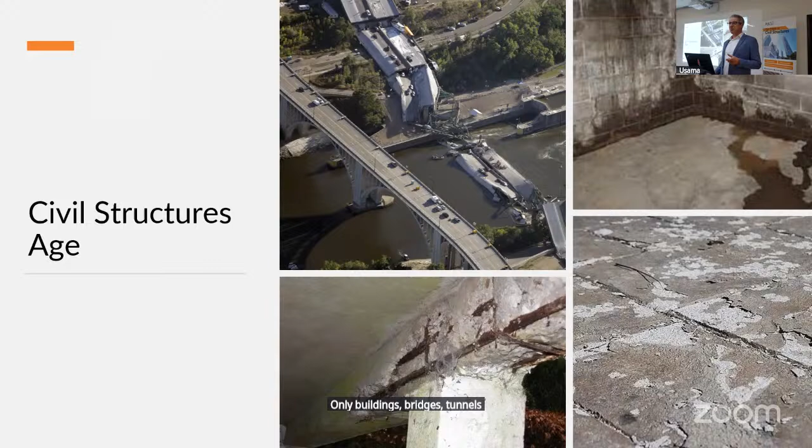We find out about those currently through periodic inspection. Periodic inspection happens every 2 to 5 years, depending on the client, depending on the regulations. To share with you the output of what RTA looks at, for instance, here locally, they do regular inspection of their assets, and then they categorize those assets from 1 to 4, 1 being good, 4 being critical.

Good is described as the element shows no deterioration. It implies it's visual - a visual inspection. Visual inspection tells us what's happening on the surface; they don't go beyond that. Go a step further to fair: minor cracks and spalls are appearing. So already we have cracks and spalls that require repair. That's the extent of what visual inspection can inform us.

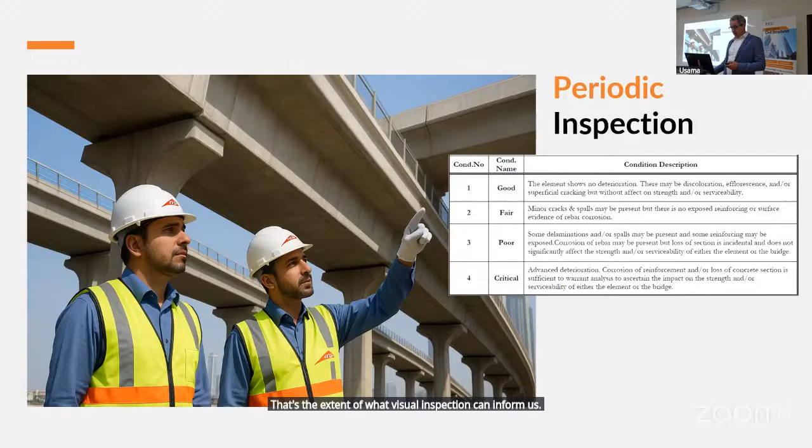One of the other challenges of periodic inspection is access limitation. Sometimes you require special access equipment to be able to reach the areas requiring inspection. And there are underwater structures that may require specialized divers to inspect and inform us about what's happening visually.

We can go beyond the visual using non-destructive techniques, non-destructive inspection. That is usually called upon when visual inspection already tells us there's an issue. Visual inspection uncovers an issue, and we go a step further using NDT to find out how widespread the issue is. That's when we'll start looking a little bit beneath. But NDT also has limitations in terms of how inaccessible areas can be reached.

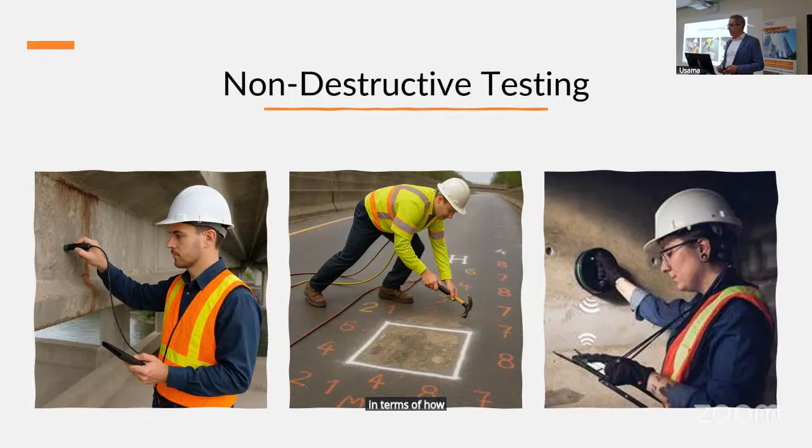In 85% of cases, we find out about problems when they're quite advanced, when they require major repairs. And just like with human health, if you catch something late, the intervention is more complicated, may not be as effective, and is more costly. That's what happens with major repairs.

We're involved in a project in Business Bay where the parking has been shut down for repairs. You've been through traffic, you know the parking situation in the city. When the parking is shut down for repair, that's a major disruption for the tenants of that building, and a major reputational disruption for the landlord. So repairs, when they're major, are quite disruptive and costly.

Sometimes we uncover things a bit too late. These are actual cases in Dubai. This is a headline from a local newspaper: '10-year-old buildings face demolition. Over 400 homeowners uncertain about future.' Expert committee finds structural defects, severe corrosion, which requires direct and rapid intervention. These things are real. It does get to that extent.

This is a collapse that happened in Dubai Marina. Corrosion was one of the causes of this collapse. So it gets this bad.

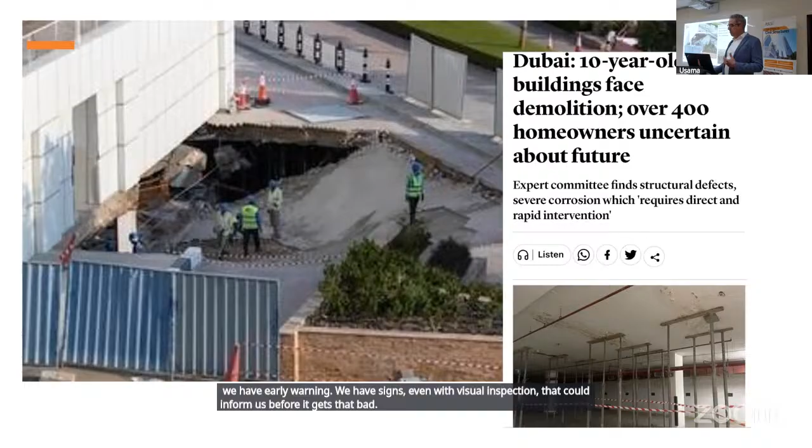Usually we have early warning. We have signs, even with visual inspection, that could inform us before it gets that bad. But still, these things happen.

So to talk about our topic, IoT. IoT in structural engineering is not something new. It's been around for decades under the name of structural health monitoring. Structural health monitoring is a strategy for detecting, monitoring, and predicting the health of civil structures, ensuring their safety, durability, and efficiency. This is a definition from a CIRIA guide, CIRIA C788.

It's a guideline for structural health monitoring in civil engineering. This guideline was written by a group of experts in the field from different consulting companies. I'm not sure if anybody here is from AECOM - AECOM was the lead in this. Mott MacDonald participated, some people from Buro Happold participated as well.

So if you look at the guide, hopefully you'll have it in your libraries, it lists the different individuals, the experts who wrote this. There's a lot of valuable information in this guide that provides insights into different aspects, including the deployment.

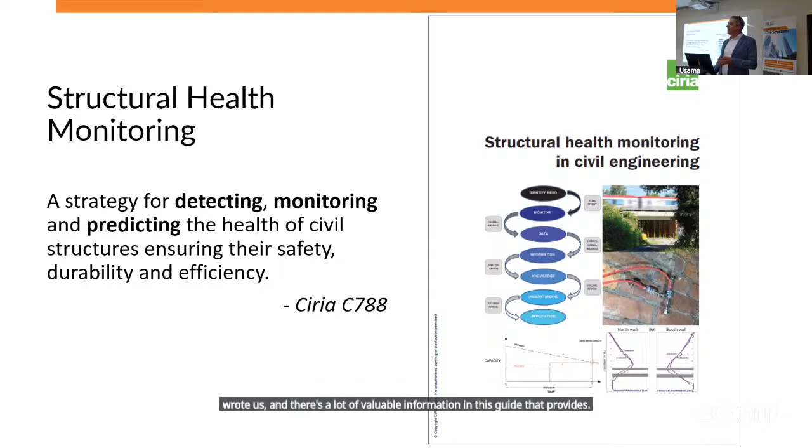So it gives guidelines in the deployment of structural health monitoring. The starting point of deployment is identifying the quantities of interest and physical quantities. What is meant by quantities of interest? These are the parameters that the engineer is interested in monitoring.

But we're not always able to measure the specific parameters that we're looking for, so sometimes we have to derive them. That's the physical quantities - physical quantities are what we measure. Quantities of interest are really the insights we're looking for to help with decision making in the future. For example, a bending moment cannot be monitored directly - you monitor the strains and derive the bending moment.

In the realm of durability, the most important unit is time, because durability is how long you can rely on the engineering properties of a material. So you care about that time, but you cannot detect that directly. You wind up measuring millivolts and microamps to derive what is the remaining time before failure.

So you start out by identifying what you need to monitor, what's critical for that specific structure. Then you move on to modeling what the monitoring system is expected to monitor. There are theoretical models in all aspects - in durability, we do service life prediction to predict when we expect failures.

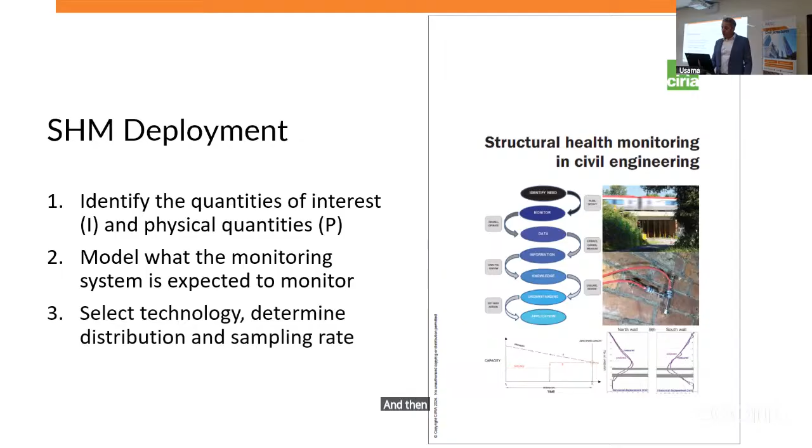And then based on what we're seeking to measure, we select the technology - what sensor types, what data transmission, all of that. We determine the distribution and sampling rates. This guide provides some parameters to consider in those decisions.

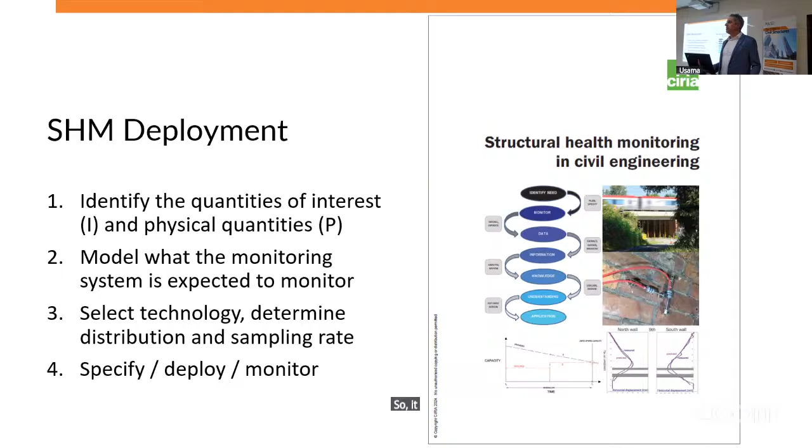And then there's the specification, deployment, and monitoring. Again, this guide has a chapter about specifying how to specify structural health monitoring, and a chapter about procurement of the SHM components. So it's an advisable reference if you're interested in moving forward with structural health monitoring.

The components of structural health monitoring start out with the sensors - different types of sensors for different parameters. The sensors are connected to a data acquisition hub that collects that data and transmits it, usually to the cloud or a server, where the data crunching happens and we get those insights. We can then program the alerts and visualization of the data.

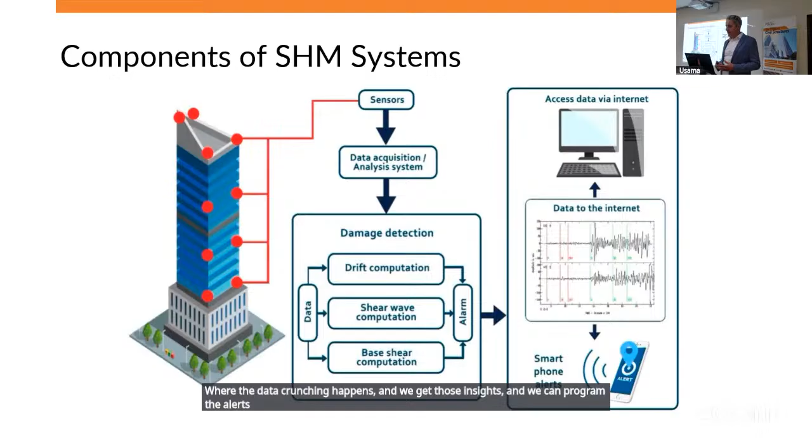The sensor types can be categorized into 5 different categories: load and stress measurement, displacement and deformation, vibration and dynamic response, environmental and exposure, and the topic of today, what we're going to focus on - durability. Durability is not as commonly used in the industry. We find a lot of structural properties being monitored, although durability is a big thing for structures - it's one of the most limiting factors to the longevity of a structure.

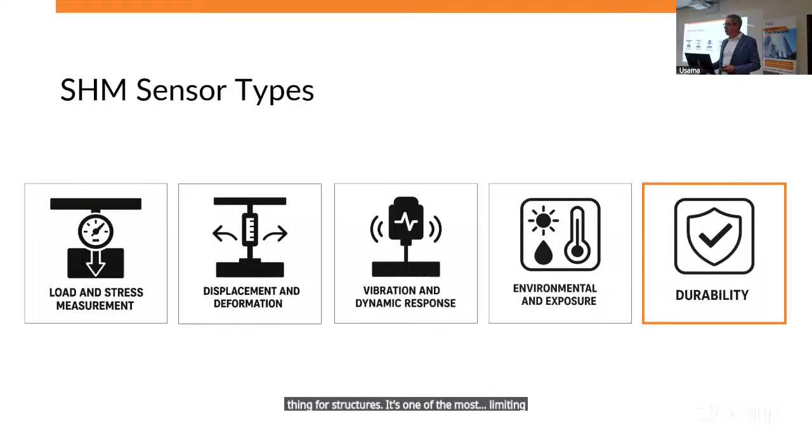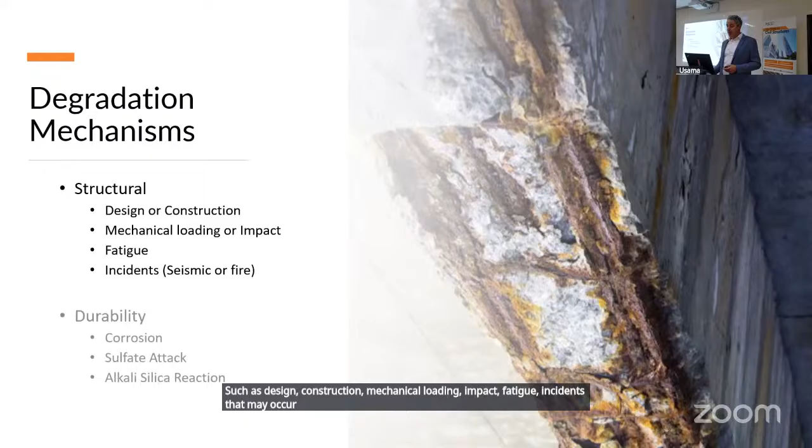To talk about durability and its monitoring, we start by looking at the degradation mechanisms. ACI 201 defines the different degradation mechanisms for reinforced concrete structures. These can be classified into structural issues, such as design, construction, mechanical loading, impact, fatigue, and incidents, and durability concerns that are more environmental or material related, such as corrosion, sulfate attack, and alkali silica reaction.

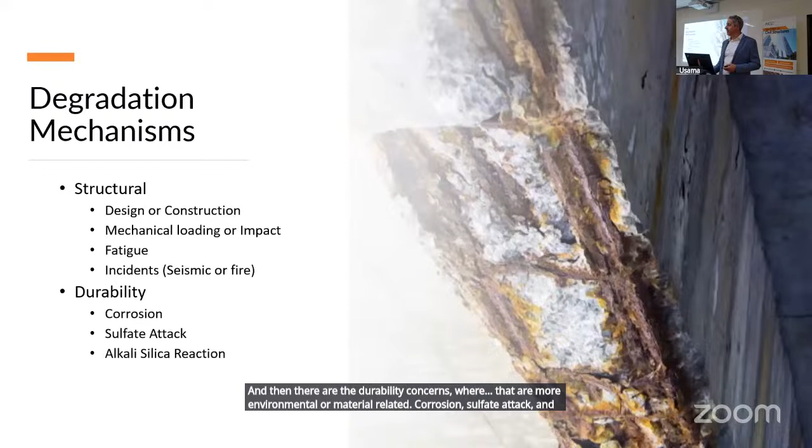Corrosion remains the dominant form of degradation. A study of over 700 different repair projects looked at the cause, and 55% of them were from corrosion. We also live in a very corrosive environment here in the Arabian Gulf. The Gulf waters are only second to the Dead Sea from a salinity perspective. The groundwater is quite high with very high levels of chlorides, which is unique to this region, causing high risk for the substructures.

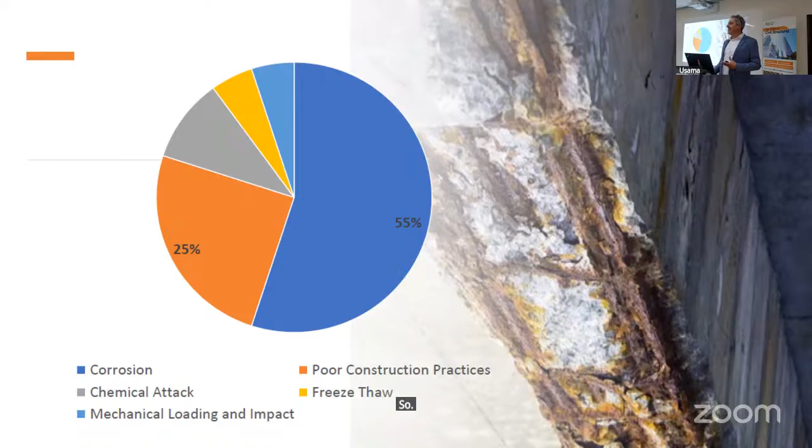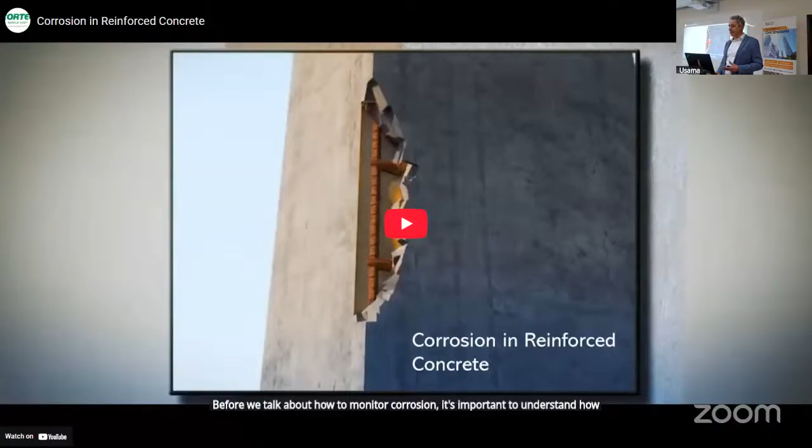So corrosion is definitely an area of interest and focus. Before we talk about how to monitor corrosion, it's important to understand how corrosion occurs. I'm sharing with you this video to walk us through how corrosion happens.

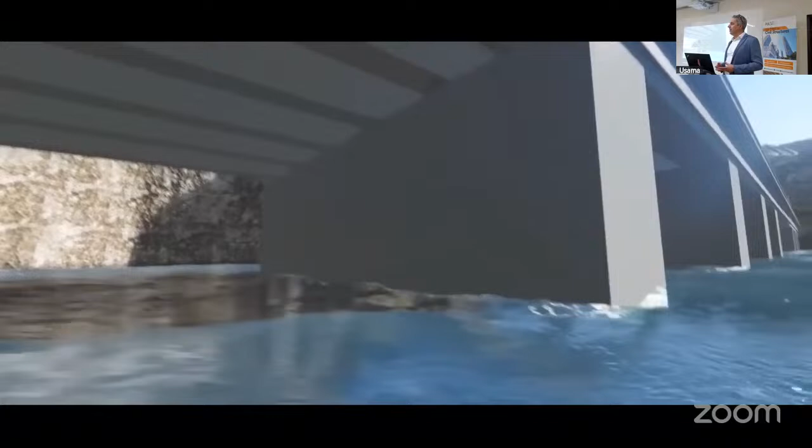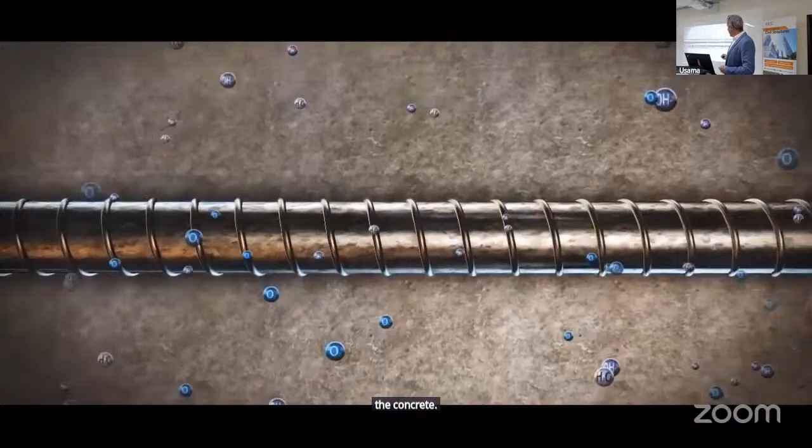Steel in concrete is naturally protected by concrete. The reinforcement is protected by the alkalinity of the concrete. Hydroxides form on the surface of the rebar, protecting it even in the presence of oxygen and moisture. Take the same steel rebar, put it outside, and it'll start rusting. Put it in an alkaline environment such as concrete, even with oxygen and moisture, and it's not going to corrode.

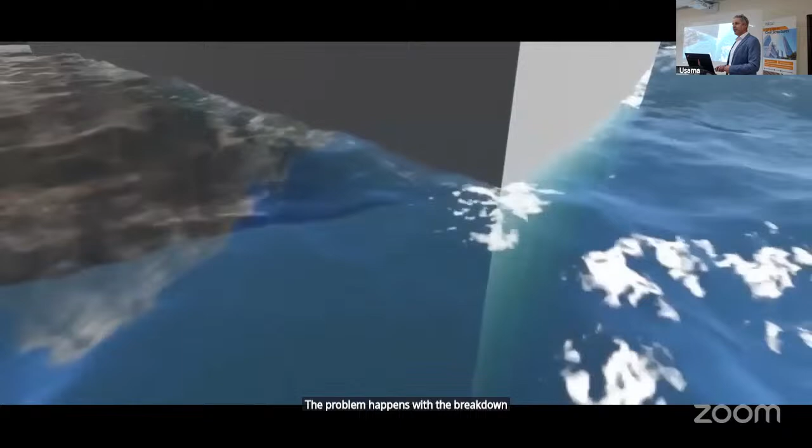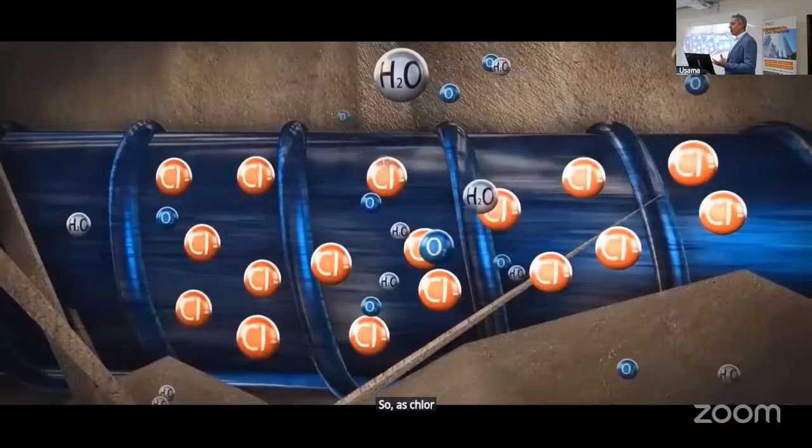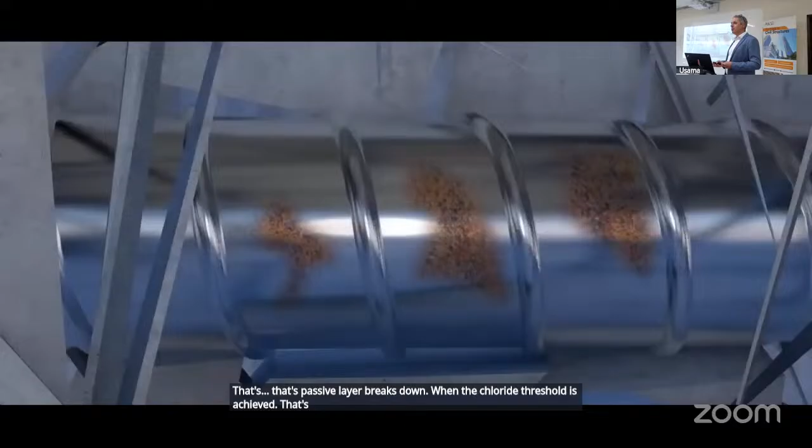The problem happens with the breakdown of that passive layer, which occurs due to carbonation, but in our region where salinity is high, chlorides are the main culprit and the much more aggressive one. As chlorides diffuse through concrete and reach the steel reinforcement, that passive layer breaks down once the chloride threshold is achieved, known to be around 0.05% of concrete by mass.

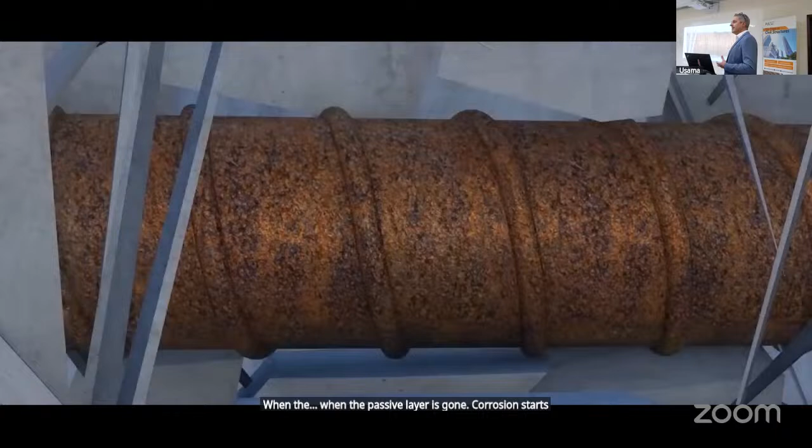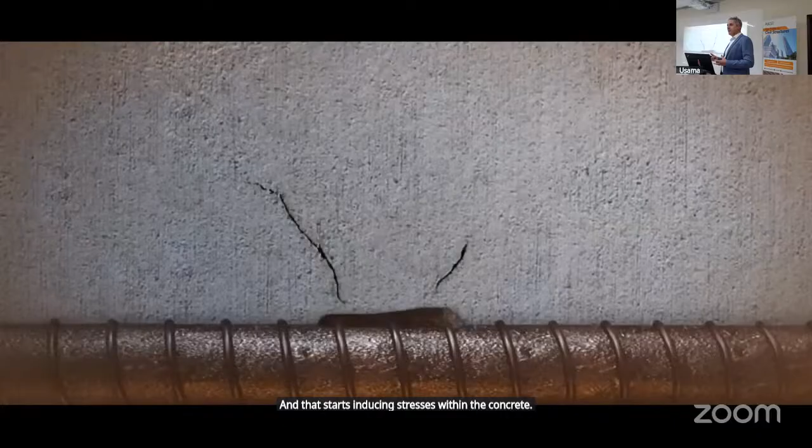When the passive layer is gone, corrosion starts. Oxides and hydroxides are formed, and those have a bigger volume than the original steel volume, which induces stresses within the concrete. Concrete is great under compression but is quite challenged with tensile forces. Those tensile stresses cause cracking, which leads to more ingress of corrosive species, leading to spalling and delamination, ultimately resulting in structural failures.

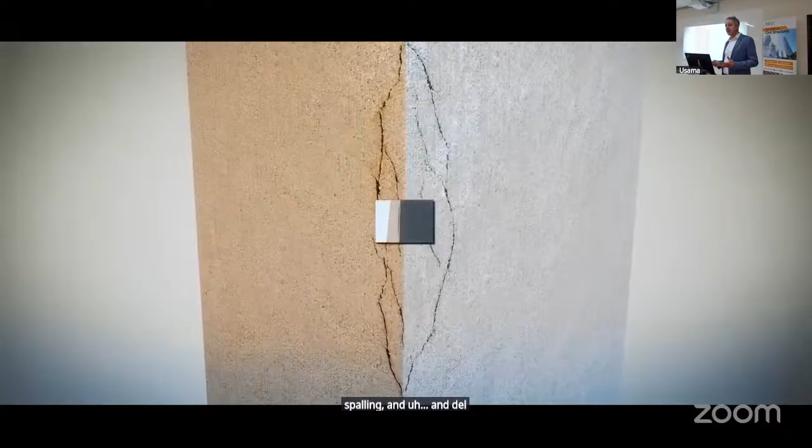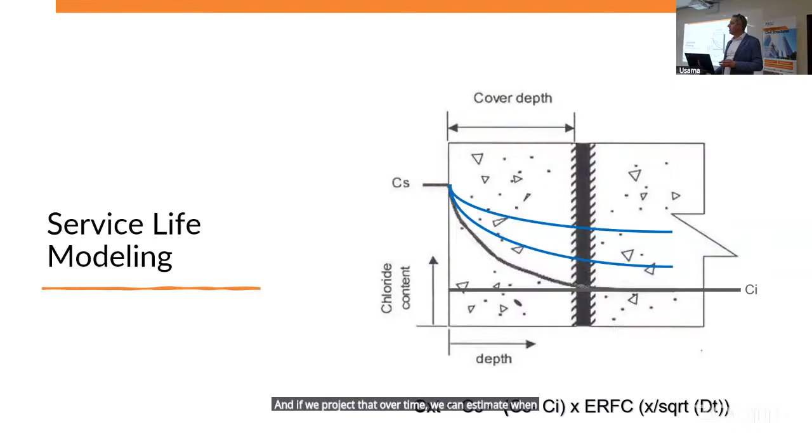Understanding the mechanism of corrosion allows us to model this process. We can model the service life, the time to failure, for reinforced concrete structures by assuming the surface chloride based on field data, knowing the concrete cover and the quality of the concrete. We can calculate the profile of chlorides within the concrete over time, and if we project that, we can estimate when the chloride threshold will reach the surface of the rebar and corrosion starts.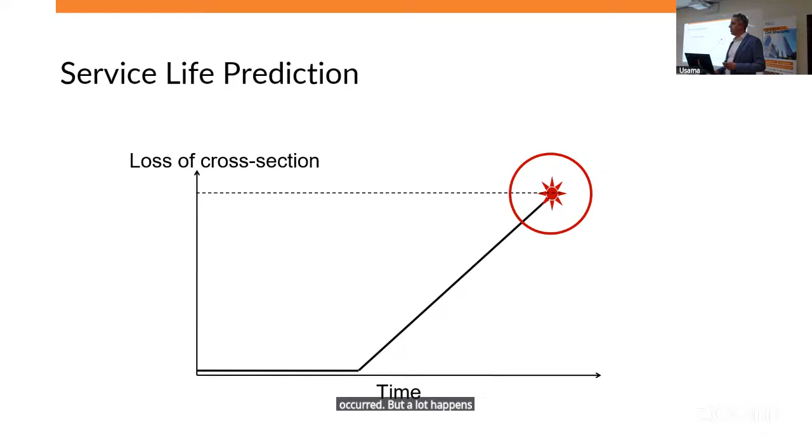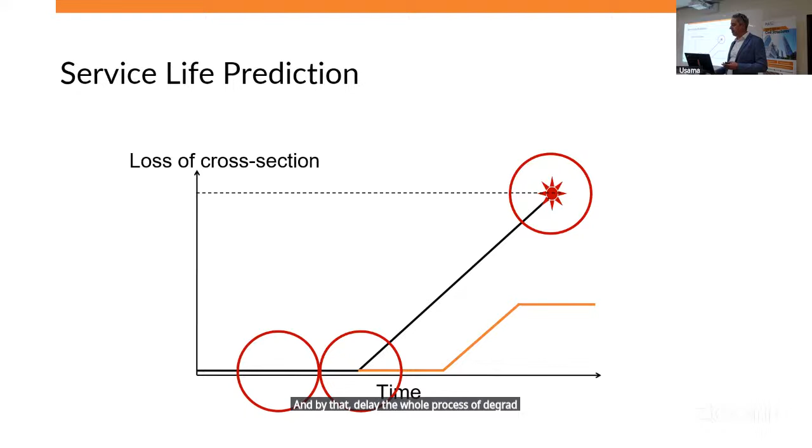Going back to what I started with, inspection is where RTA inspectors find out about problems with their structures, but that's when cracking has already occurred. A lot happens before cracking occurs. If we use non-destructive techniques and monitoring techniques, we can find out about problems at the initiation of corrosion. Some monitoring techniques I'll be sharing with you, something we've developed, inform us before corrosion happens. If we know before corrosion starts at the rebar surface, we can intervene and delay the onset of corrosion, delaying the whole process of degradation and repair. We can get ahead of it and be in control of it.

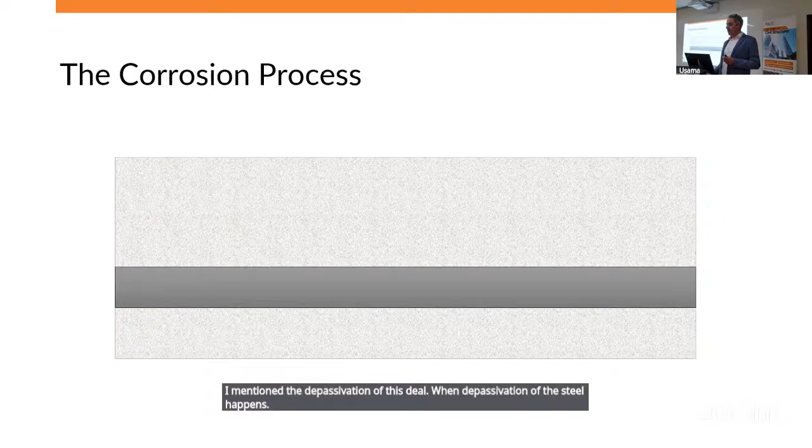To zoom in a bit more on the corrosion process, I mentioned the depassivation of the steel. When this happens, anodes and cathodes form on the steel surface because concrete is heterogeneous, not homogeneous, and the rebar itself, steel, is also a heterogeneous material. Different locations will have different electrochemical potentials, so you have positives and negatives with electrons wanting to move, and the anode wants to discharge electrons to the cathode.

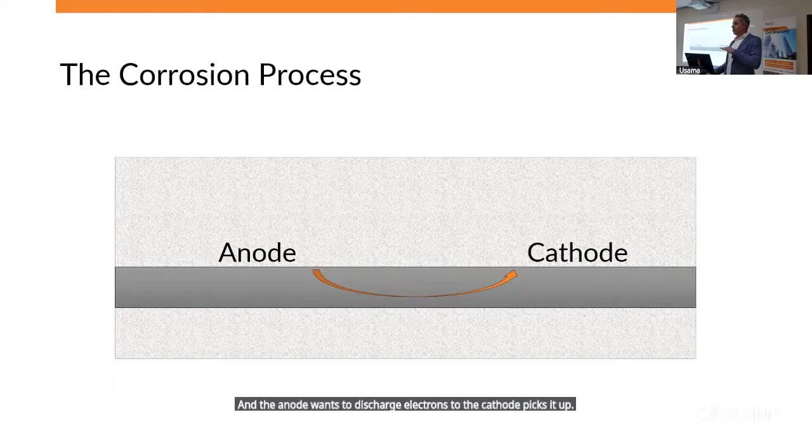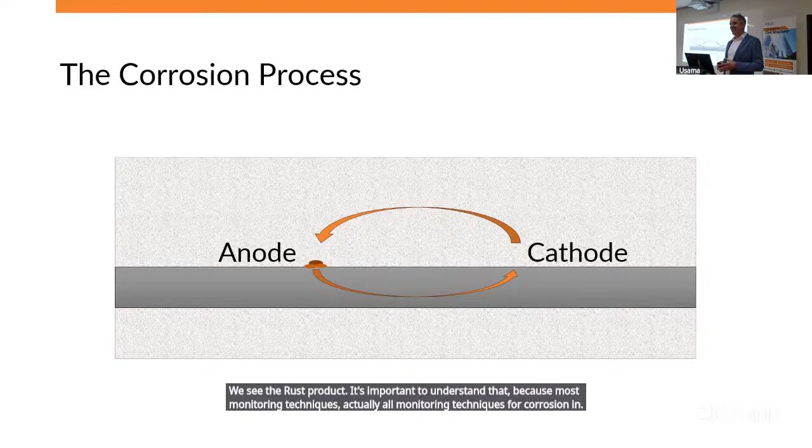The cathode picks up the electrons, and a surface reaction happens at the cathode where hydroxides are formed. At the anode, there's loss of metal as the iron reacts with oxides and hydroxides, forming the rust product we see. It's important to understand this because most, actually all, monitoring techniques for corrosion in concrete are based on electrochemical measurements. We look at monitoring and mapping out the potentials to understand what is happening in the steel.

So let's move on to durability monitoring. Similar to all structural health monitoring, we've got sensors embedded in concrete structures connected to data acquisition hubs that transmit the data. Then we have platforms that inform us and alert us of what's happening.

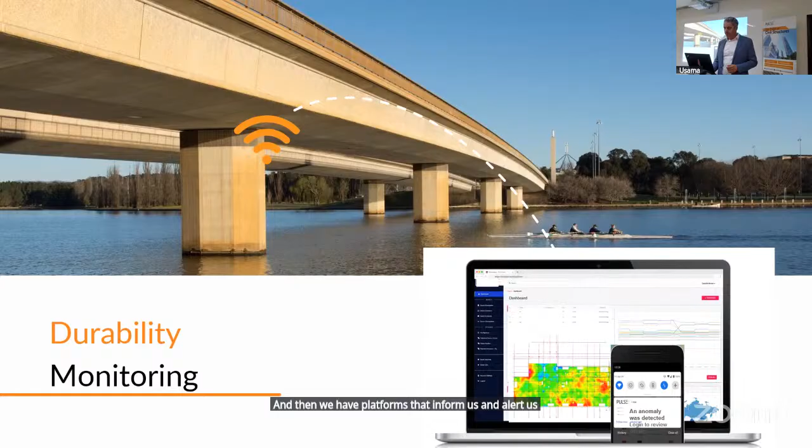To look at the sensor types, there are different sensor types available for corrosion monitoring. I'll list them and we'll double click on a couple of them.

So there's reference electrodes. These are the most commonly used. They've been with us since the 70s, I believe, reference electrodes being used in concrete structures.

Electrochemical potential mapping, this is a unique system that we've developed. I'll talk about that in more depth.

Multi-factor sensors detect multiple factors at different depths. There are 6 parameters: pH, chloride levels, potential, current, resistivity, and moisture level. It's great in providing a lot of data, but it's limited in that you can't have too many of these deployed, so it depends on the location you select. But it has use in combination with other sensors.

Anode ladders are also something that's been with us for a while. They provide predictive insights, but they're quite bulky, and they use reference electrodes in conjunction with the anode ladders.

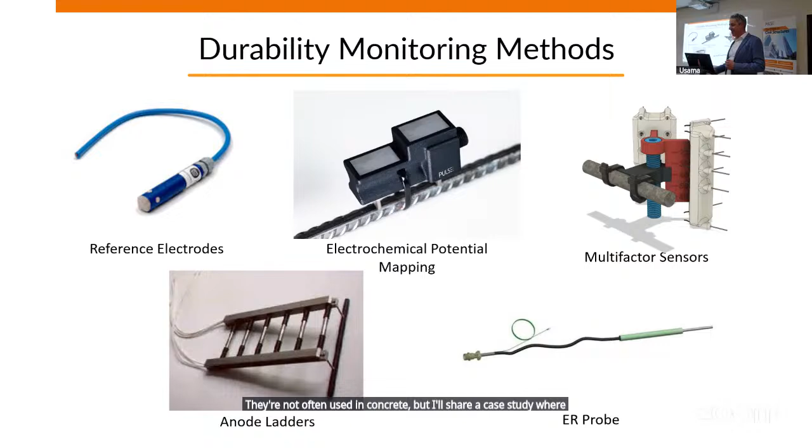ER probes measure electrical resistance, the changes in electrical resistance, to derive corrosion rates. They're not often used in concrete, but I'll share a case study where they are also used in concrete. They're more used in oil and gas applications.

To look at reference electrodes, let's start with these since they're the most commonly used. Reference electrodes are stable references. As I mentioned, corrosion has a dynamic nature of anodes and cathodes, so if we have a reference to benchmark, we're able to detect shifts in potentials on the steel.

So what we're monitoring is the electrochemical potential of the rebar. We will know when the risk of corrosion has increased at the surface of the rebar. We won't know ahead of time, but we will know when something is happening at the surface of the rebar.

One of the advantages is it's standardized as per ASTM C876. There are different reference electrodes. I've got a few samples with me here.

So for instance, this is a manganese oxide reference electrode. It's a solid reference electrode that can be embedded in concrete. A cable goes out and you can read the potential between the rebar. There has to be a lead to the rebar and another to the reference electrode, and you can monitor the potential over time.

It's also used as an inspection tool. This is a version of a reference electrode used as an inspection tool. From the surface of the concrete, you can take the readings. This particular one is copper and copper sulfate, so it's a copper metal in a copper sulfate solution that provides stability of potential.

Moving on to electrochemical potential mapping. The sensors that we developed really map out electrochemical potential by embedding these sensors. I'll hold one close to the camera for our audience on Zoom to see. These sensors have different levels of sensing elements, a series of sensing elements.

The sensor is mounted on rebar, on the first layer of rebar. It is tied to the first layer of rebar and sits within the concrete cover. As corrosive species start coming through, as chlorides start coming through the concrete surface and reach the top sensing element...

its potential shifts. This corrodes, it becomes anodic to the rebar, and we monitor that shift in potential. That informs us that we're getting activity at a certain level in a certain location. We have a second step to also validate that data and validate the insight. Over time, we would expect it to activate, and ultimately the rebar will activate.

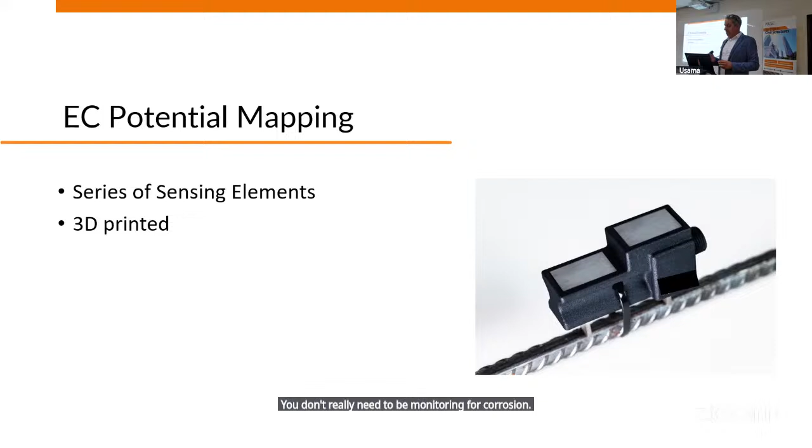These sensors are 3D printed to accommodate the different concrete covers that we get in structural elements, such as a 50mm cover or 75mm cover. We rarely go below 50mm. If it's below 50mm, most likely the environment isn't corrosive, and you don't really need to be monitoring for corrosion. But it can be customized to meet the structural element in question.

One of the main advantages of this method is we're benchmarking steel and concrete to steel and concrete, the same metallurgy and the same material. So drift over time does not occur the way it does with reference electrodes. That's one of the key advantages that allows us to derive insights over time.

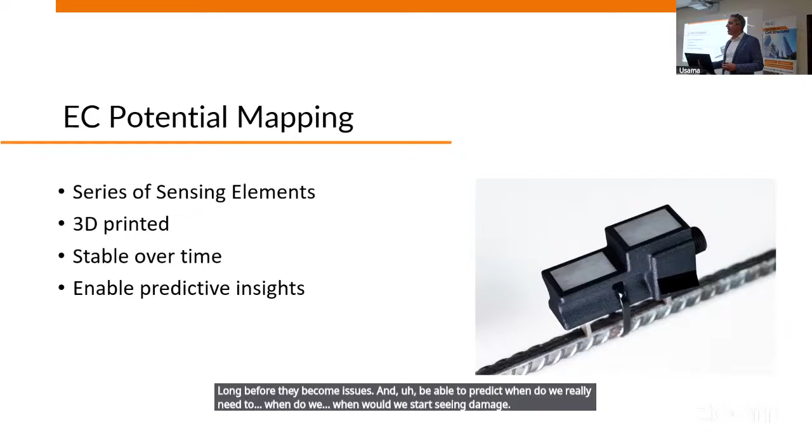And it enables predictive insights. Having these steps allows us to discover issues long before they become issues, and be able to predict when we would start seeing damage. So how much time do we have to intervene? Which opens up the options. So this predictive capability is really, we look at the differences, the depth of the sensing element compared to the cover. And it's an exponential relationship.

In Fick's second law of diffusion, which is used for service life modeling, the concrete cover exponentially affects the diffusion of chlorides to the steel. So, to give an example to explain this, it's much easier.

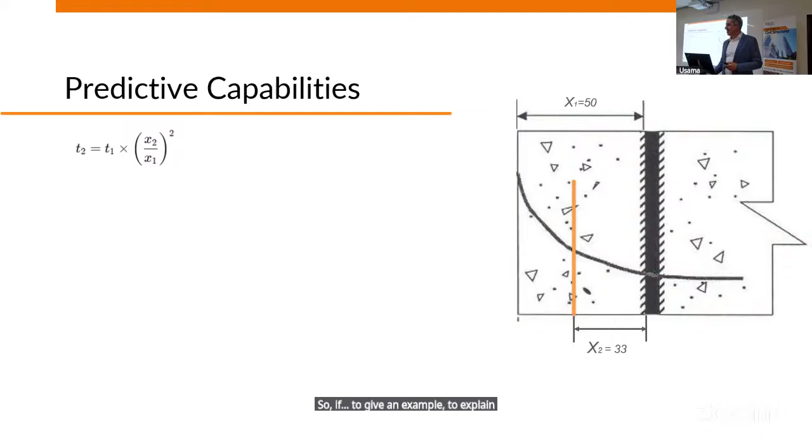Let's assume we have a structure that has been designed for a 50-year service life. A durability study has been done based on the diffusion of this concrete mix, and based on the concrete cover, we're achieving 50 years theoretically. The rebar cover is 50 millimeters. The sensor depth is 33 millimeters. The top sensor is 33 millimeters. So cover 50, sensor at 33 millimeters. Theoretically, we expect this sensing element to trigger after 21 years within the service life of the structure.

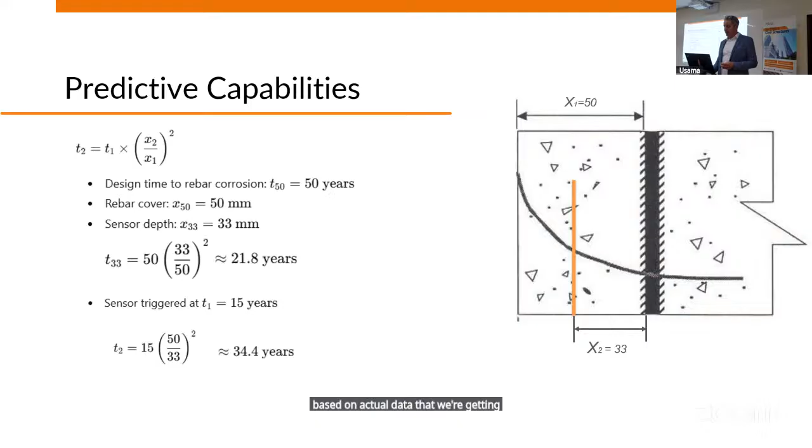If this gets triggered at a different time, let's say 15 years, we can go back and adjust the service life based on actual data that we're getting in the field. According to this calculation, this has a 34-year service life. Here I'm showing an example where we uncovered things earlier than they're supposed to happen, but it could be the reverse also. It could be that we don't detect anything for 30 years, where you can adjust and give the assurance to the asset owner that the structure will last long beyond the design life. So it gives us a field method of validating the design life, validating the service life based on actual data.

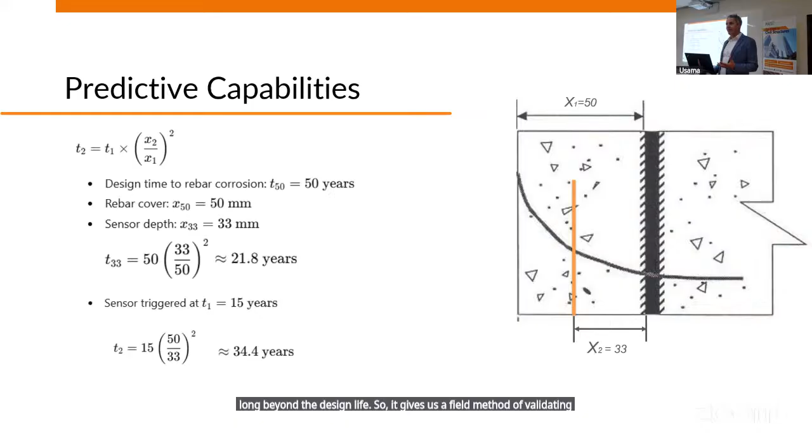Now, this methodology has been tested extensively in the lab through accelerated test methods. A lot of that was done in a nearby lab here at the American University in Dubai. So we did a lot of accelerated testing along with Dr. Nagy, where we look at different things. First of all, we validate that the data that we're getting reflects reality. So we've done testing to do that. We also have run testing to validate that the sensor will continue to give us the data throughout the service life, because a sensor that you embed in concrete, you want to make sure that it has the functional life of the concrete.

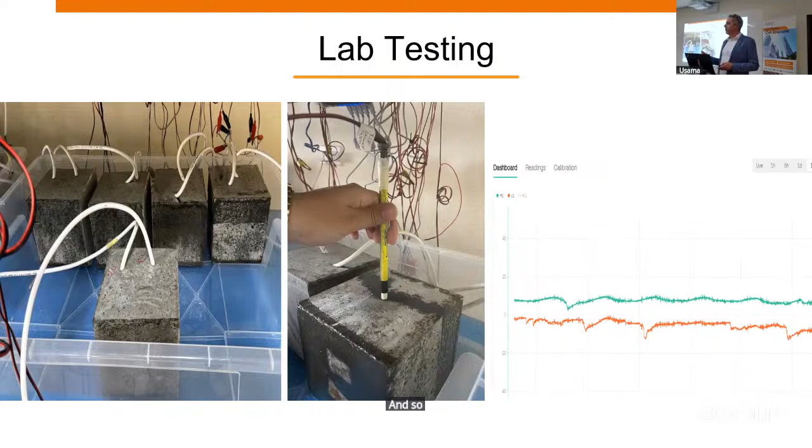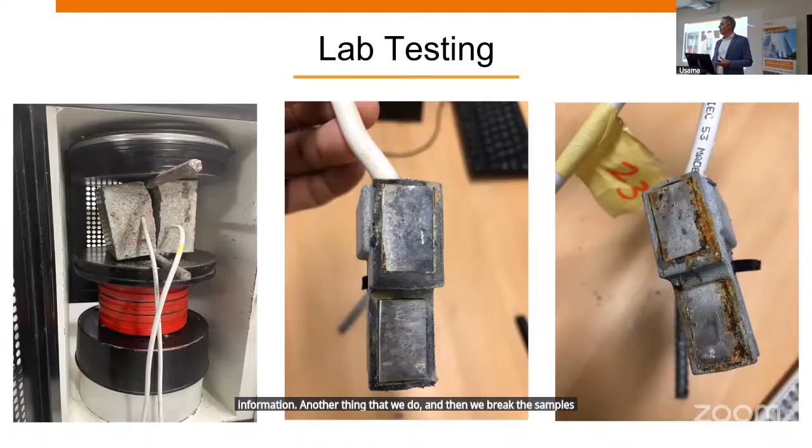And so we're able to run the full cycle where corrosion happens at the two sensing elements and the rebar, and we're still getting information. Another thing that we do is break the samples to uncover the specimens, the sensors, and validate that what we're getting is actually correct.

We also did benchmark testing versus the standardized reference electrodes. In this case, we cast specimens using the ASTM-G109 methodology, concrete beams instrumented with our sensors and with the silver chloride reference electrodes, and data was collected over time. These specimens were subjected to varied exposure conditions, wet and dry.

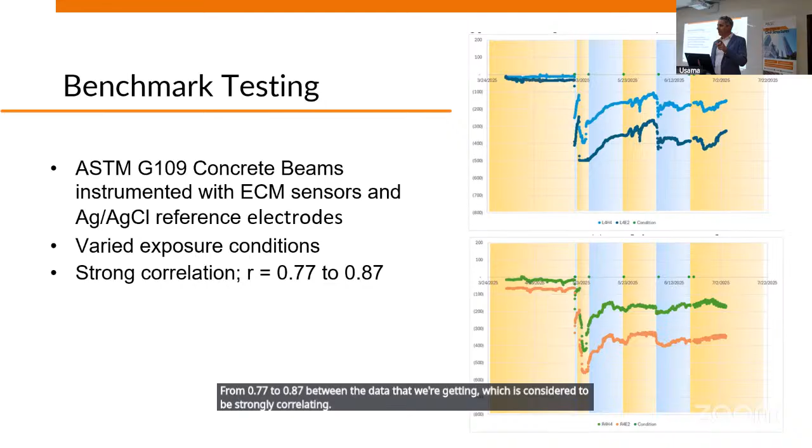These graphs here show the results from one of the specimens, where you see how when it was wetted, potentials start shifting. The light blue line is the pulse sensor. The dark blue line is the silver chloride. You see how the correlation is quite tight between the data that we're getting and the standardized data. This is another specimen here. Again, the correlation that was calculated ranged from 0.77 to 0.87 between the data that we're getting, which is considered to be strongly correlating in the Pearson correlation methodology.

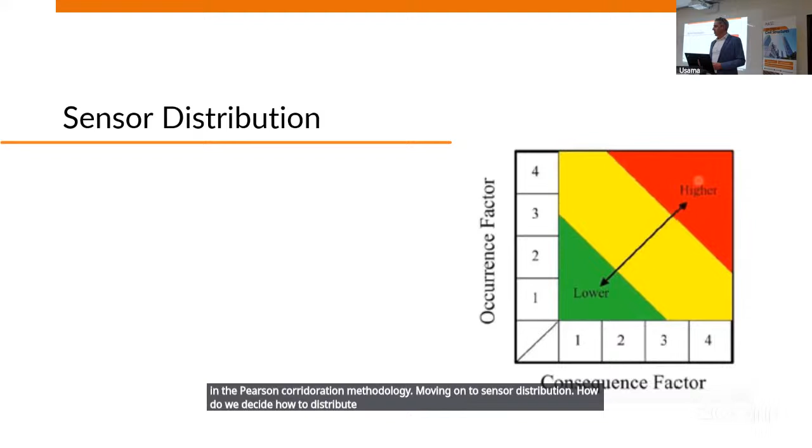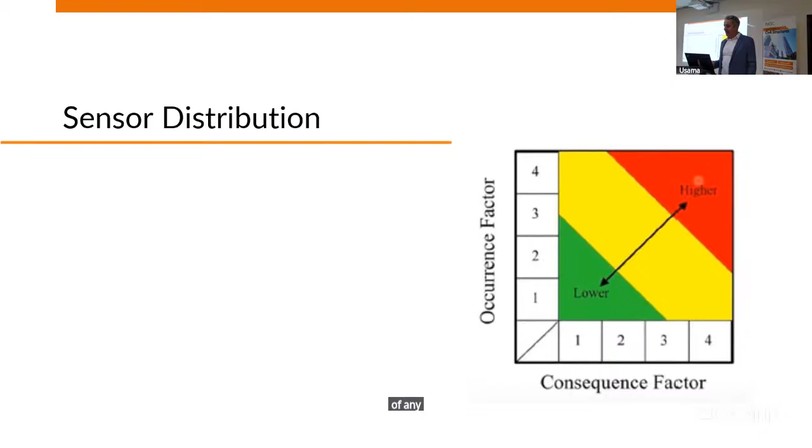Moving on to sensor distribution: how do we decide how to distribute the sensors in a project? We consider the consequence factor and the occurrence factor. So consequence, how severe will the consequence be of any failure? And how likely is this failure to occur?

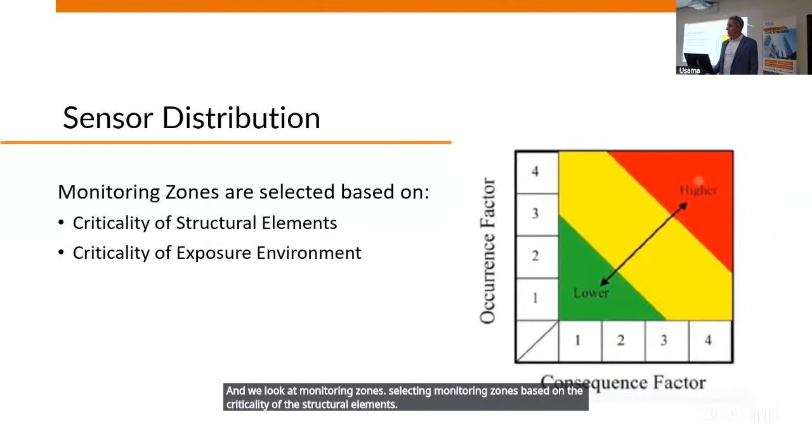And we look at monitoring zones, selecting monitoring zones based on the criticality of the structural elements, criticality of the exposure environment. We don't place corrosion monitoring everywhere. Wherever you have a corrosive environment, it would make sense. So substructures exposed to saline groundwater, marine, coastal environments—that's where you would consider having corrosion monitoring.

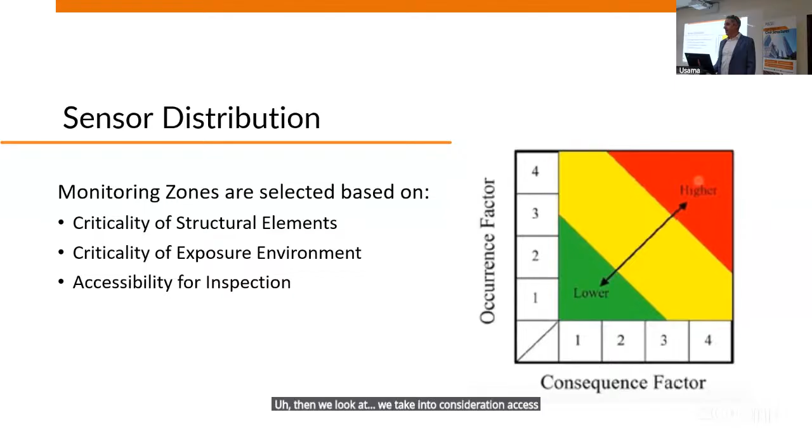Then we take into consideration accessibility for inspection. Areas that are not easily inspected, it makes sense to monitor. Ultimately, the decision on where to locate the sensors also considered the detailing, the joints. These are usually the weak areas in structures, where failures start, so it's very beneficial to know when things start before they propagate beyond those initial stages.

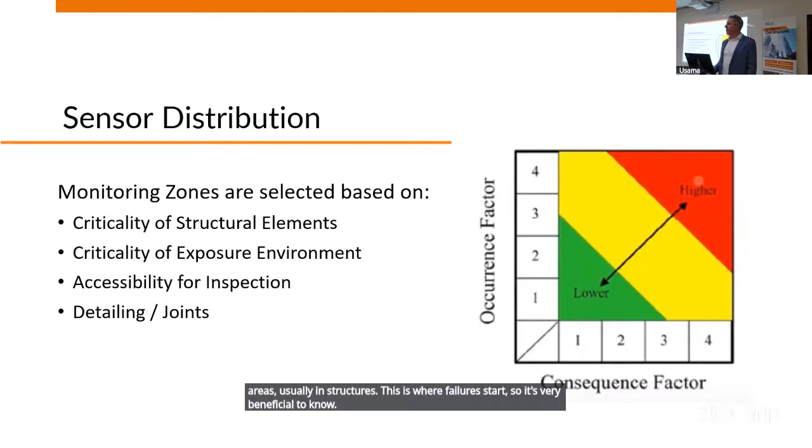We deploy the sensors, connect them to data acquisition hubs that collect and transmit the data, most likely wirelessly. We have multiple ways of communicating with the hubs. LoRa is a common method used in IoT in general. Bluetooth, Wi-Fi, GSM, depending on where the structures are, you could use different protocols. In certain cases wired connection can be used, and in industrial settings they tend to prefer that because of the noise that may be caused by other operating environments.

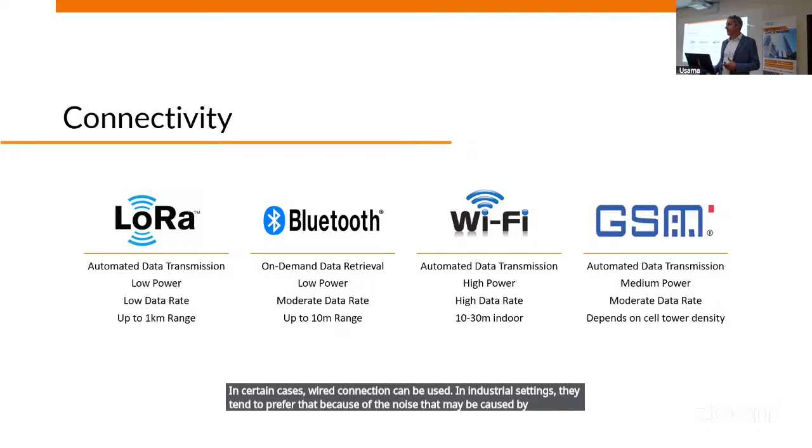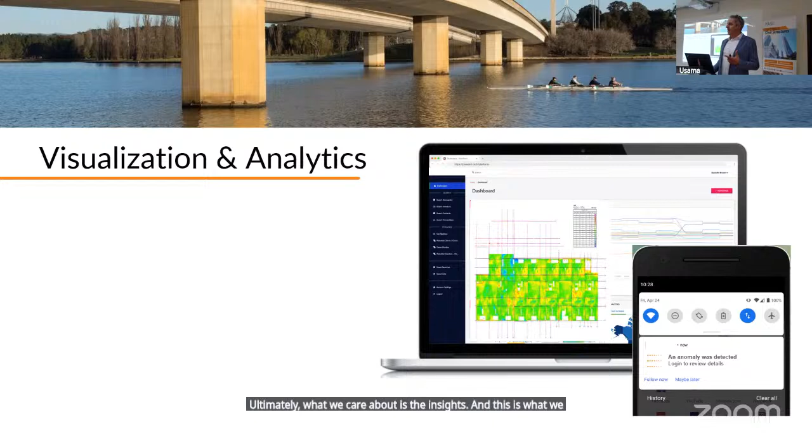Ultimately, what we care about is the insights, and this is what we get on the platform. A good platform provides analysis and modeling of the data we're getting from the sensors. System notifications are critical. A durability management platform isn't something one's going to be watching every day, it's not the stock market. It's something people will likely forget about until one day you get a notification, so it's important to have notifications that alert us.

You double click on the notification, go to data visualization, and you can see a heat map. Where is the problem happening? How deep is the problem? Then move on to predictive analytics. I'm seeing an anomaly in a certain area - when do I expect the rebar to start corroding? What can I do? You start considering interventions.

One of the key important things is interoperability. We live in an era where everything is being digitized. Building management systems are gaining traction, and more people are using them. And digital twins are the hype now - I wouldn't say hype because there's a lot of value to digital twins. They're growing in adoption. So what is a digital twin?

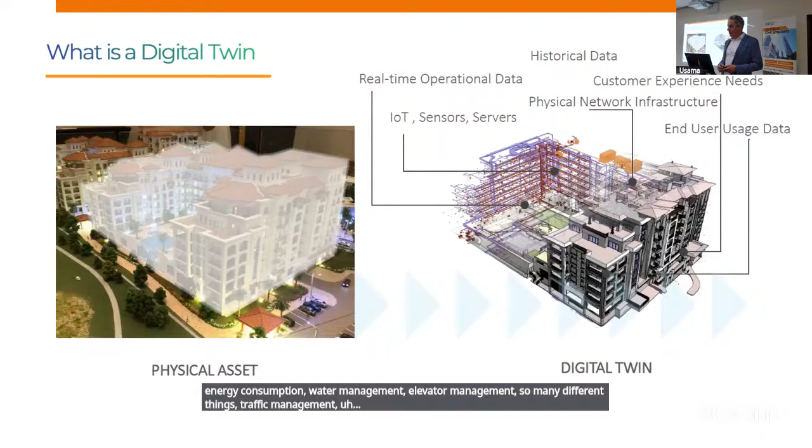A digital twin is not just a 3D model of a physical asset, it's a live model of that asset. It gets data from the asset - energy consumption, water management, elevator management, traffic management, so many different things within a structure that can be reflected on a digital twin. And also structural health monitoring can be reflected on a digital twin.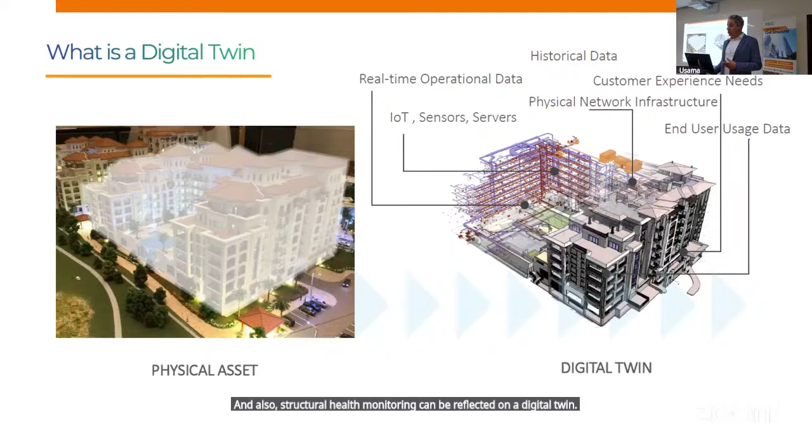There's a maturity level for digital twins, known to be at 5 levels, starting with level 1, which is collecting the data about what's happening in a structure - the as-built twin. So it tells us what's happening in a structure. The next level of maturity tells us why it happened, giving us some interpretation, some analysis of what's happening.

The third level is predictive, where it tells us what will happen based on the data that we have - what can we predict? Then it moves on to what should happen - what should we do? This is the prescriptive analytics and proposing interventions. We're not exactly there yet, but with machine learning, AI, and a lot of data, we're going to get there.

Ultimately, the intelligent twin is where you control the intervention, where you actually automate the intervention. This is possible in some solutions like cathodic protection for concrete structures, but as robotics develop and so on, maybe one day we will have a fully intelligent twin.

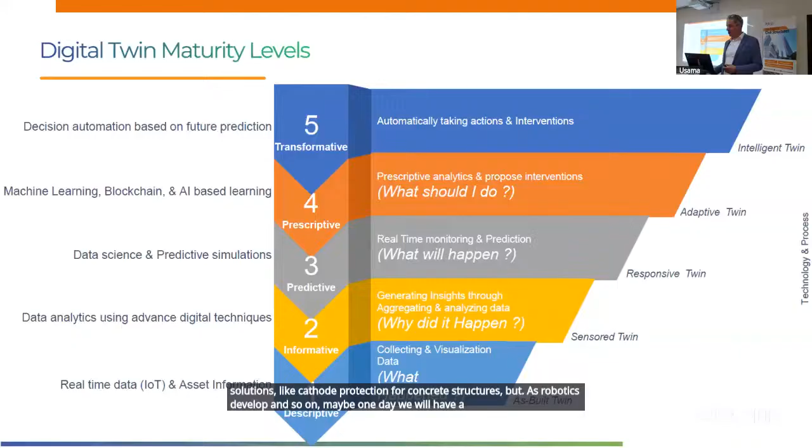It's always important to think about, okay, if I detect something early, what can I do? If it's something like a substructure, can I do anything? What options are available for us? There are multiple early intervention options. Sometimes if we discover something happening around a joint, it could be as simple as a joint repair that's needed to prevent much bigger failure in the future.

Using migrating corrosion inhibitors that can be surface applied when we know chlorides are going through but initiation has not started - you can use them to increase the chloride threshold and defer the initiation of corrosion. Using sealers and coatings to delay the ingress of chlorides. Resin injection - in many cases we have failures in basements and we wind up injecting everywhere. If we can determine where the problem started, the real root cause, that can guide us in making those decisions in repair and having more effective repairs.

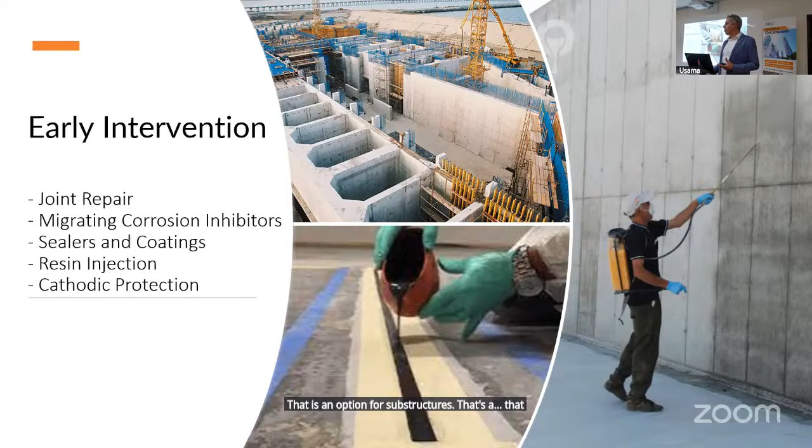I want to double click a bit about cathodic protection because that is an option for substructures - sometimes the only option in terms of future intervention. Cathodic protection is an electrochemical method of protecting steel. There are four components to any CP system: the monitoring, the actual corrosion monitoring; the rebar continuity, assuring the rebar is all continuous; the anode, because cathodic protection basically makes our rebar the cathode, so you need an anode; and the power supply.

If we can introduce the monitoring along with the rebar continuity, which can be done during construction, that makes the structure ready for future cathodic protection if and when needed. Some install CP from the get-go, and in some cases maybe that makes sense. But it definitely makes sense to prepare the structure for possible future intervention with CP for substructures where there are limited options in the future if there are any issues.

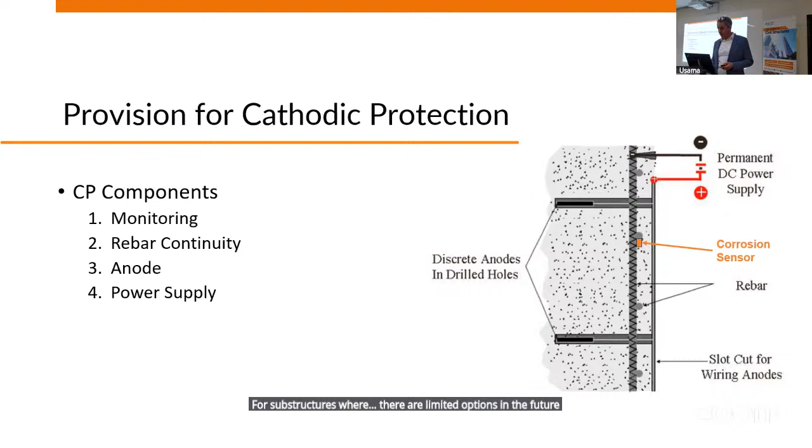I'd like to share with you a 25-year case study. We don't always get to revisit projects after so long and get insights from a monitoring system.

This is a critical structure in Dubai, shipyards in Dubai, a very aggressive environment, not only because it's marine. You have special exposure here when vessels come into the dock and park to be repaired. A gate closes, and if you see the dock next to it, it's dry because the gate closes and they drain the water out. So you have an area that is one day fully immersed in seawater and then fully dry, with a lot of oxygen. So you have that cyclic, most aggressive exposure to salt water.

This was built in the late 70s, early 80s. They had major failures in the reinforced concrete, and early on they did a repair project. You see some of the extent of the damage. They resurfaced a lot of the structures with good quality, durable concrete to give it long life.

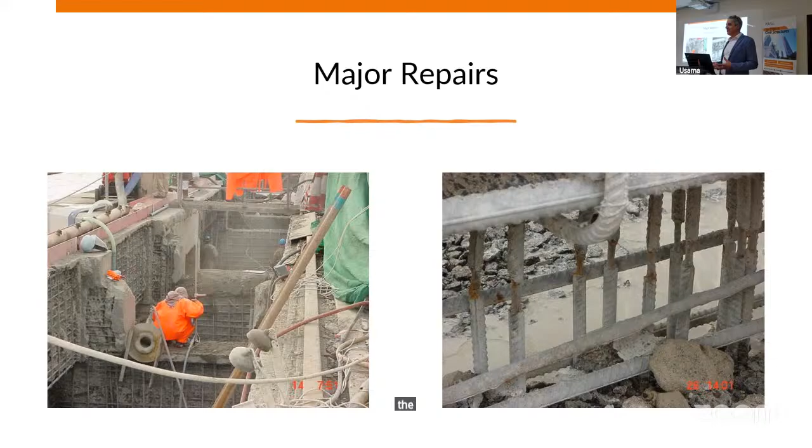25 years on, and we're approaching the 50-year mark for this facility. The client is interested in operating beyond the 50-year design life. So validating the structural integrity and making sure the structures are safe to continue to operate, they did an investigation. And luckily, 25 years ago, they had the foresight to install corrosion monitoring in their structures.

What they installed is a cluster combination of three types of monitoring devices: a silver chloride reference electrode, a coupon—a very similar concept to what we're doing with our sensors, an early generation of it—and an ER probe, which is an electrical resistance probe that measures corrosion rates. So they really have a robust corrosion monitoring methodology.

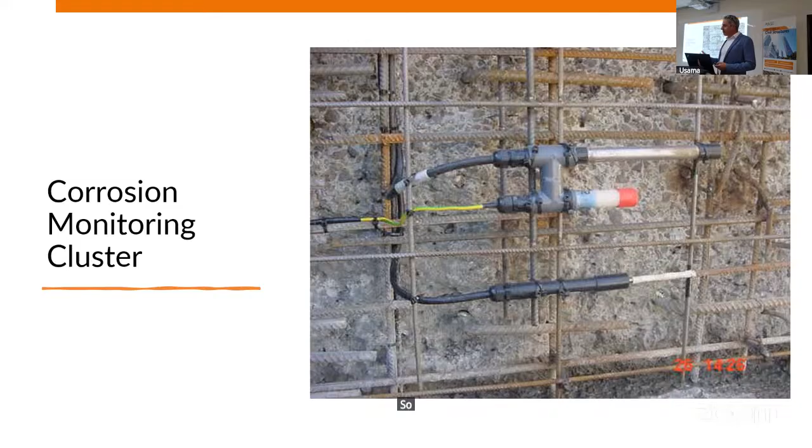The limitation is that the data was collected manually, and after time they stopped collecting it. So we went in and did an inspection for this structure, an inspection for the system, and we had multiple learnings from this exercise.

The first learning is we validated the sensor functionality—that after 25 years, we were able to get some data from the coupons, from the reference electrodes, and from some of the ER probes.

We were able to confirm the drift that happens with the reference electrodes. The data has drifted all over the place, and the challenge was it didn't drift in one direction—it drifted positive, negative, all over the place. We were able to recalibrate, but that still requires continuous recalibration.

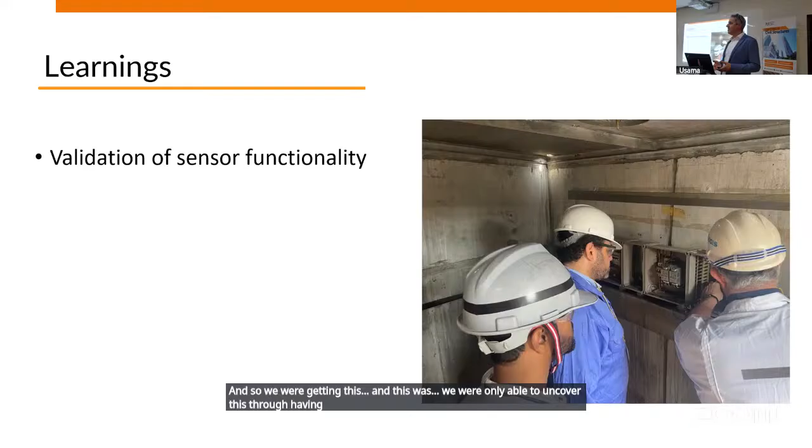The coupons provided us with the biggest insight. They were able to identify a specific type of corrosion, macro cell corrosion, that is occurring where the repaired areas were protected. The areas that were repaired were in good condition, but the areas that were not repaired, in an anaerobic environment, were acting as the anode to the repaired areas. We were only able to uncover this through having a monitoring system—a surface inspection wouldn't have uncovered this.

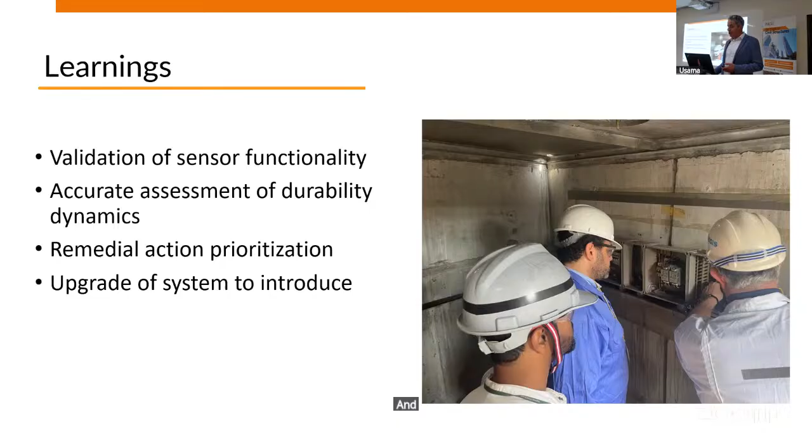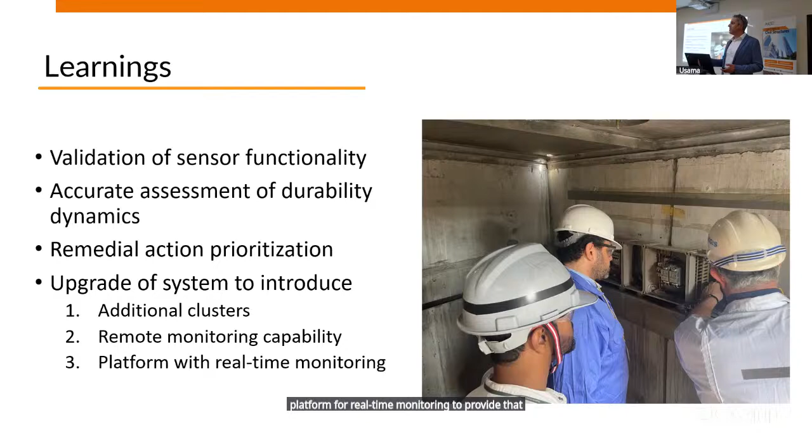This allowed us to have an accurate assessment of the durability dynamics and allowed us to support the client in remedial action prioritization, because in an operating plant, remedial actions are very disruptive, so you want to schedule and prioritize them. Additionally, we're upgrading the system to introduce additional clusters, remote monitoring capability, and a platform for real-time monitoring to provide assurance moving forward about the integrity of the structures.

So in summary, real-time monitoring has general benefits to the asset owner in enabling predictive maintenance, which is more effective, cost-effective, and can be planned, ultimately extending the asset life for the asset owner.

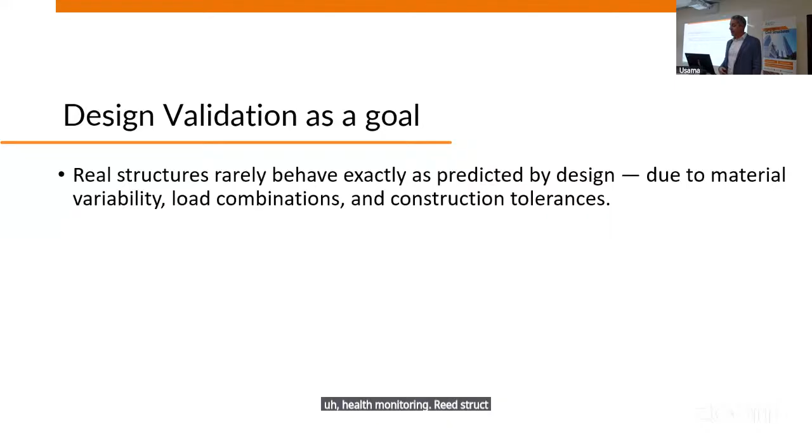Another advantage, specific to structural engineers I would say, is the validation of design—design validation as a goal by using structural health monitoring. Real structures rarely behave exactly as predicted by design, due to material variability, load combinations, construction tolerances. What we get in reality is not what is on the drawing board. Structural health monitoring bridges that gap between theoretical design assumptions and actual structural behavior.

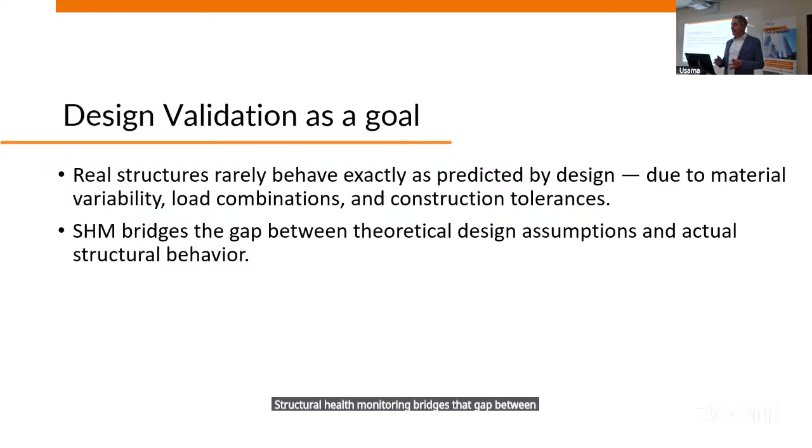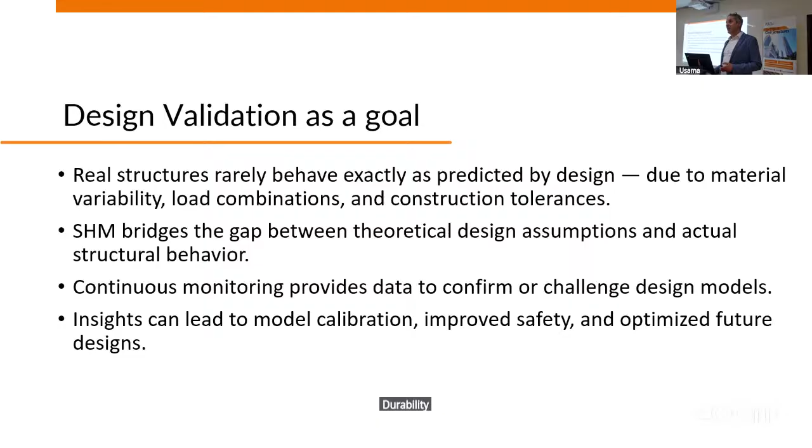These insights provide a feedback loop to structural engineers in designing future structures. Continuous monitoring provides data to confirm or challenge design models, and insights can lead to model calibration, improved safety, and optimized future designs. So I invite you all to consider structural health monitoring, durability monitoring specifically, in your future projects, and I'm happy to take your questions.

Thank you very much, Usama. Very insightful presentation. I liked your analogy with the human aging and the importance of early detection.

Let's start with questions from the room. Any questions here? Dr. Shapoor? So what's the cost? What's the time required before you can approach this, and at what stage should it be approached? How much does it cost for implementing and monitoring it? Assuming it's in 25 years, am I going to continue monitoring in 25 years time myself?

Good question. In terms of cost, the answer is it depends on the structure, but I'll give you some sense of what that is. The involvement starts from the design stage. When the client decides to have monitoring, we review the drawings, look at the exposure conditions, and make a recommendation on the distribution of the system, the sensors, what data acquisition hubs are required, and so on. From that, the cost is derived.

To give you just a ballpark, for a typical building it could be anywhere between $50,000 to $100,000, even up to $150,000, based on the size of the structure. For infrastructure, you're going to go beyond that. Just to give you an idea about costs, but it really depends.